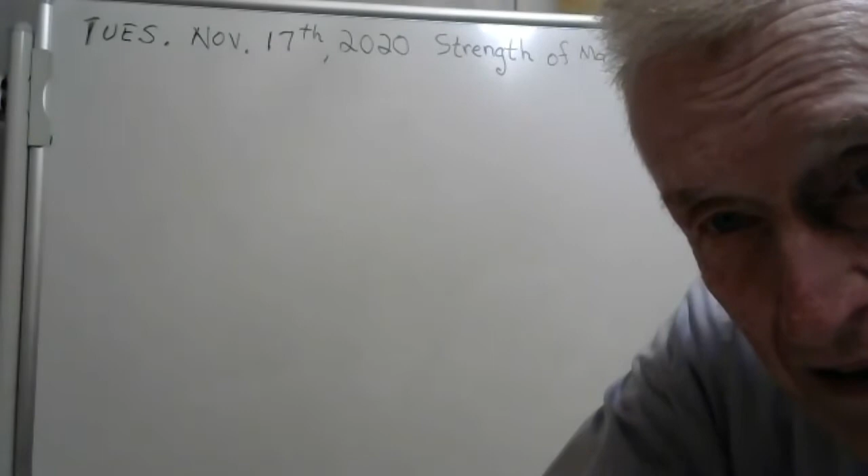Wonder why that's crooked. Yeah, that's a little better. Maybe I could scoot this. Yeah, that's good. Hey, how about it, you two? Any questions for me? Not that I can think of. So did you say you're okay? Yeah, I'm doing pretty good. Well, that's good. How are you doing? Oh, terrific. Just doing just fine. This is the 17th of November. You realize in a month, this is all going to be over. Are you guys looking forward to that? Always. Yeah, it's going to be over.

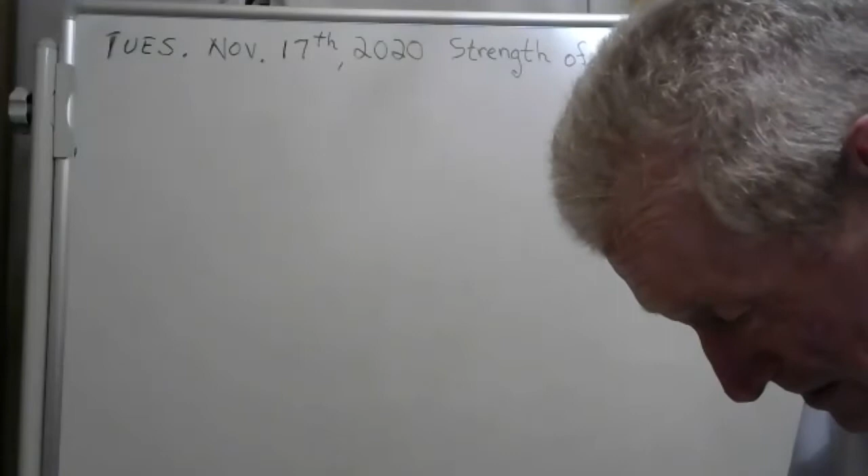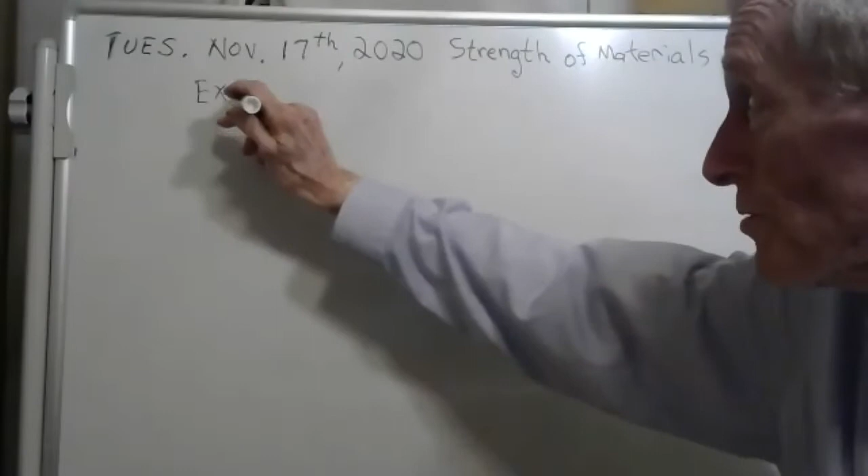Okay, I think your test is available. Let me look and see here. Today's the 17th. According to this, you're supposed to have your test available on chapter 6 and 7, and it's due Friday. So let me write that down. We've got an exam, a take home exam, open book. Isn't that nice? It should be available now, and it should be due Friday. This one doesn't write that good. Let me try a different one. Have you tried looking at that exam? Have you tried pulling it up yet? Probably not.

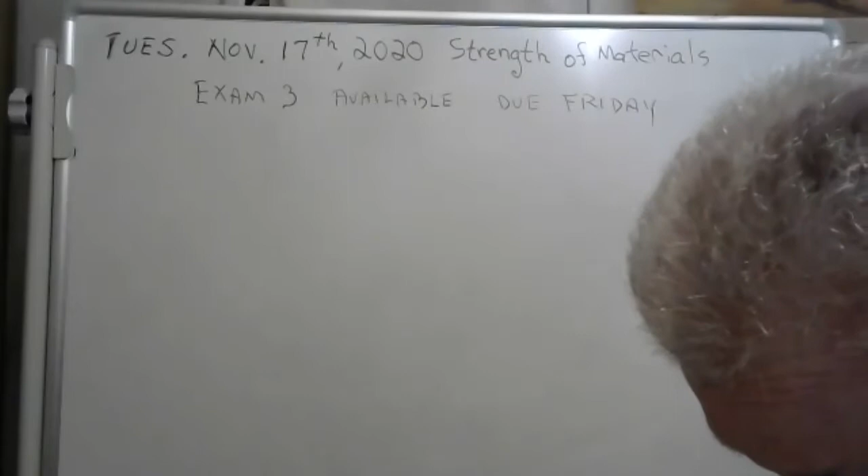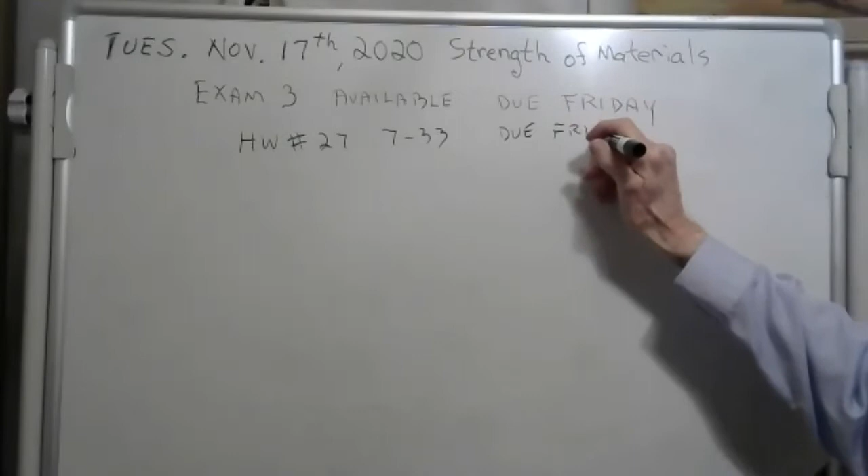But I think I make them available about 9 o'clock in the morning. This is the 17th, so yeah. There's a homework too. It's homework number 27. Homework number 27 is 7.33, and it is due Friday also. That one writes a little better. That's pretty good.

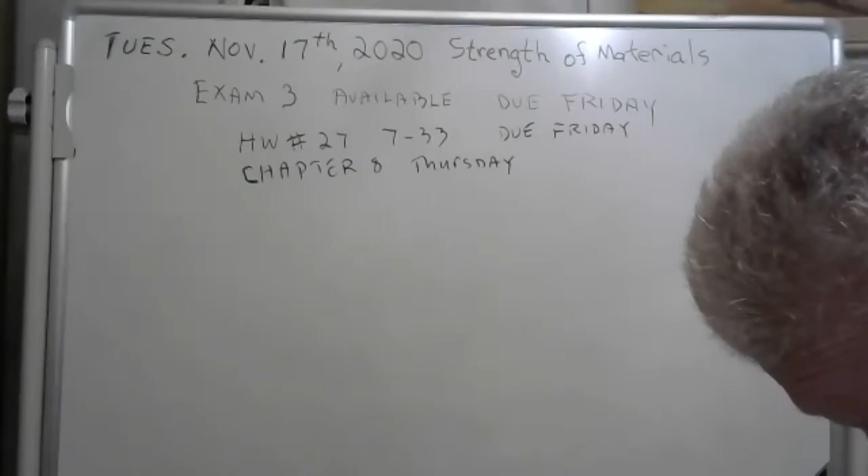And then that's going to conclude Unit 3, and we start on Unit 4 on Thursday, which is Chapter 8. So we start on Chapter 8 on Thursday. That'll be fun. And there's just not much school left here, according to this. This says the final is on the 10th? No, on the 8th. Final exam is on the 8th of December.

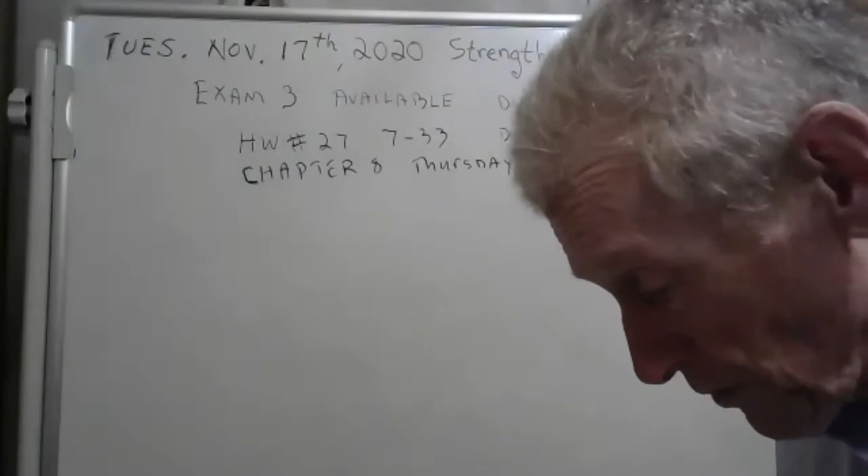I want to go over some basics. I want to go over a problem, review problem 7.5. That's what I want to do. And you know the first step on these problems is to draw a free body diagram. So let's do that first. Let me find it first. This is review problem 7.5. Where the heck is it? There it is.

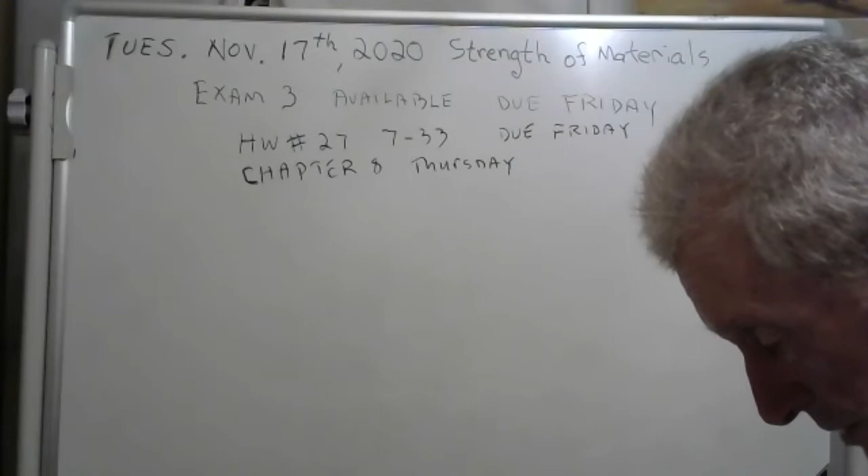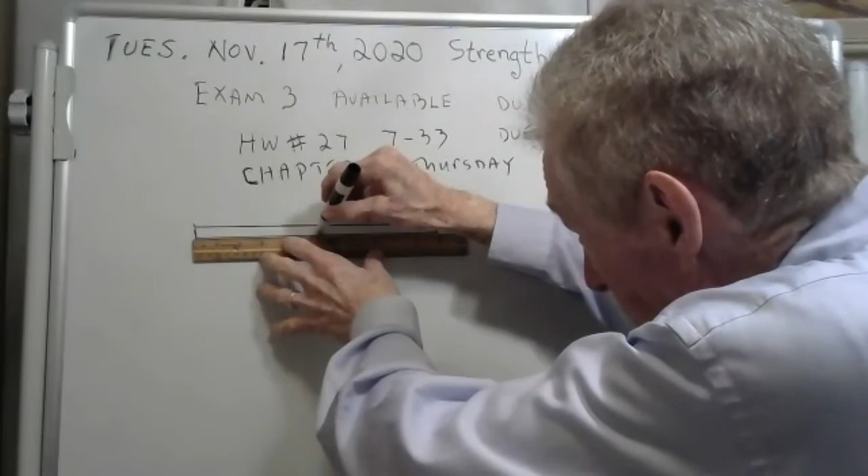Okay, let's draw this to scale here. It's 11 feet long. I'm tempted to use inches here. I wonder if there's enough room. Well, there's the announcements. We'll try drawing this. Okay, we got 11 here. And it looks like right in the middle, would that be 5.5? Something happens. And then something happens at 4, and something happens at 7.

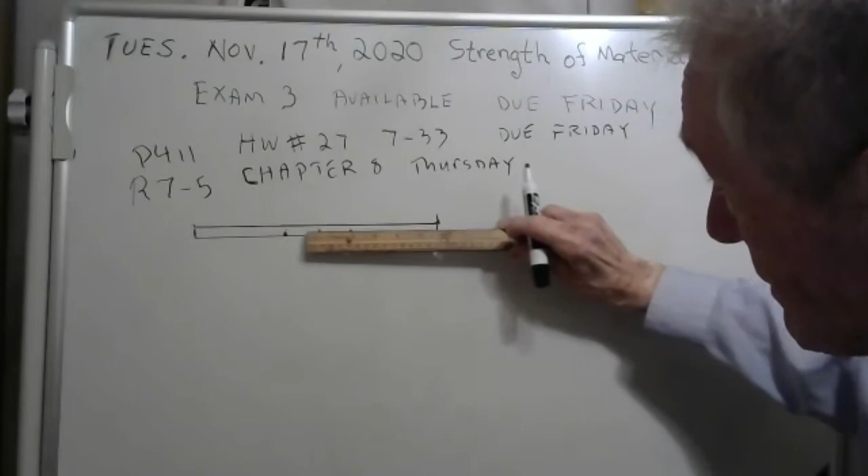This is review problem 7.5. It's on page 411. And I thought it'd be fun to go over this because it hits a lot of the basics. Now, did I measure that right? 4 inches there. Yeah, I did pretty good. 3 inches there, not too bad.

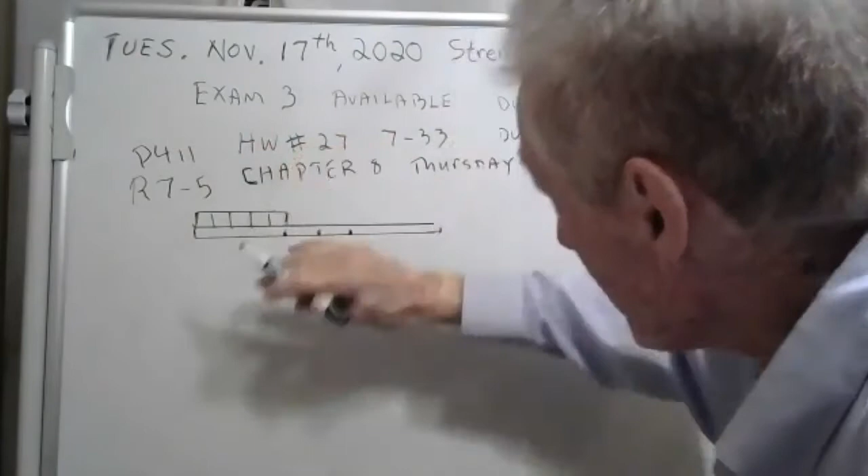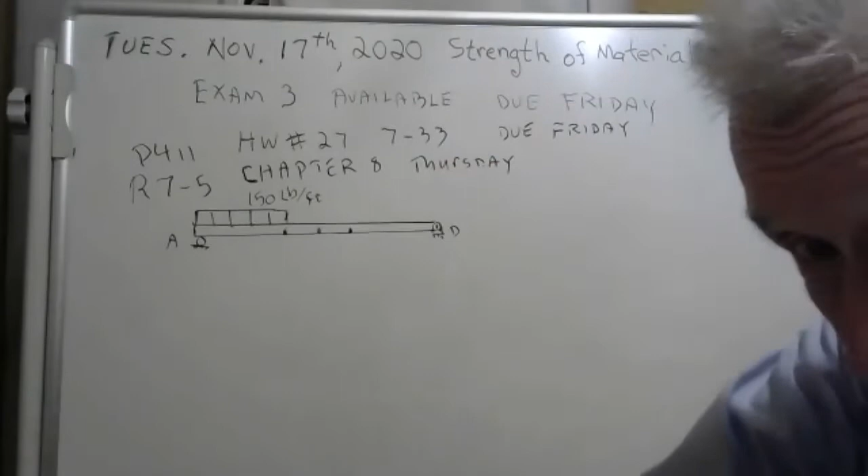Okay, now they have a distributed load there of 150. Let me draw that. Distributed load, 150 pounds per foot. Is that what it is? By Jove, that's what it is. 150 pounds per foot, going down. And then they have a roller here at A, and a smooth pin at D. I have to get some glasses one of these times, but not yet. And there's an 800-pound force right here. Let me get my red color. There's an 800-pound force right here.

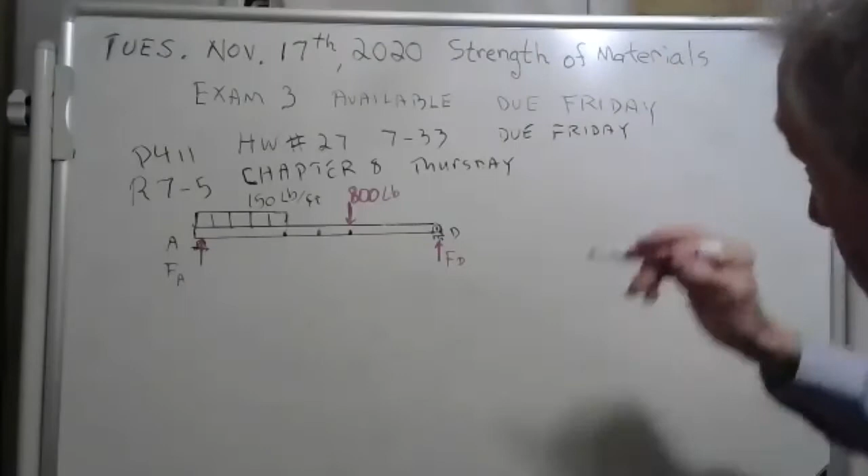Now we know there's going to be a force here at D, and there's going to be a force here at A. How about FA and FD? Those are nice names. Mr. Griffin? Yeah, I'm listening. 800 or 8,000? Ooh, we got our first thank you point of the morning, and it's a red one. That was Alex. Alex, appreciate your help very much, because I was going to get everything wrong. But thanks to Alex, we're going to get it right.

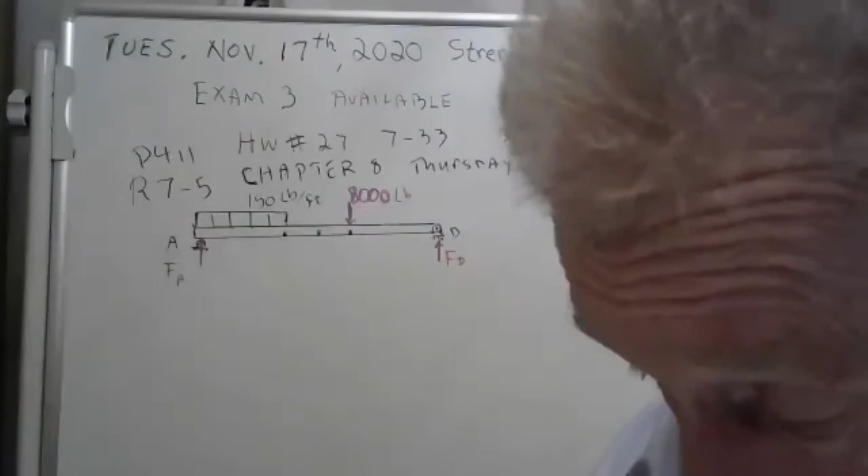Mr. Griffin? Yeah, I'm listening. I think exam 3 is still not available in the Unit 3 section of Strength of Materials. Say that again, Mohammed. I'm talking about exam 3. I couldn't see it in Blackboard. It's available? No, it's not there. Yeah.

Let me call my IT person. We're going to call the IT person here. It's so nice to have your very own IT person. Okay, we'll see if we can get her on the line here.

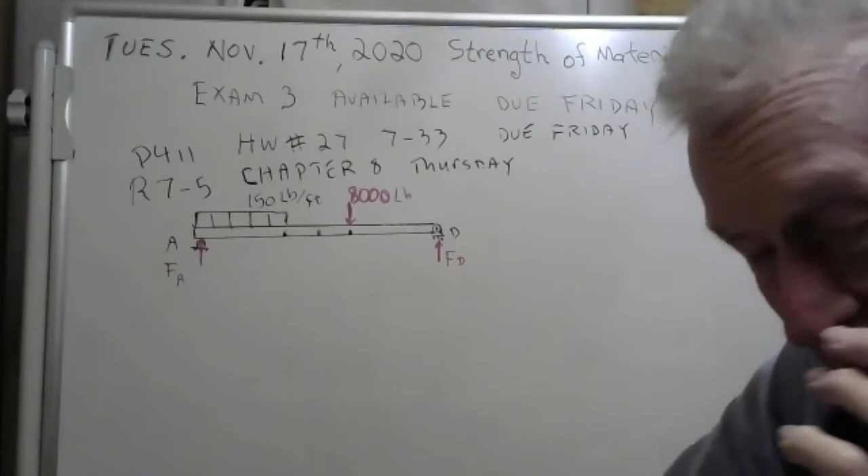Now, in the meantime, do I need to... Hey, IT person. Well, one of my excellent students says that exam 3 in strengths isn't available, and I thought it would be this morning. Okay, take your time.

You guys are pretty smart. Are we forgetting anything here? I don't think so. Now they have a section here. This is section little a, and we'll get to that.

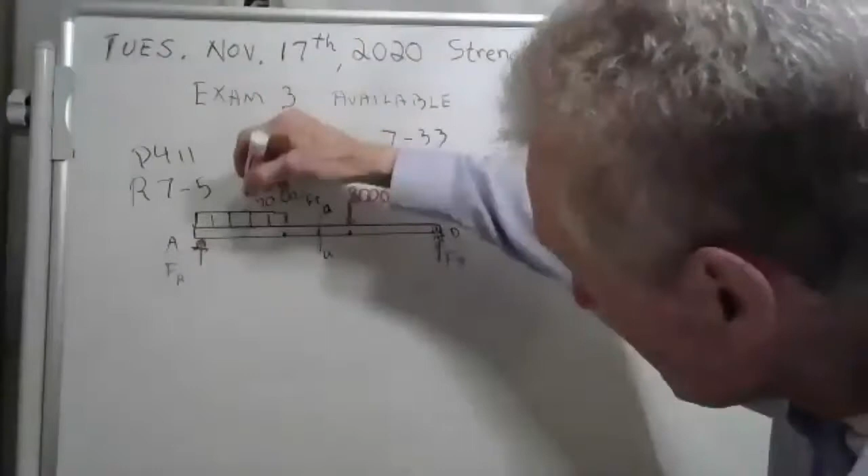But let's do this: let's put a red resultant force right here, don't you think? Let me get this red arrow here, and we're going to put it right here. Now you know that resultant force is the area of that distributed load.

So I'm going to call on one of my excellent students. Oh, I know what I forgot. I didn't put down 4 feet here. 1.5 foot, 1.5 foot, and 4 feet. So this area, you can figure it.

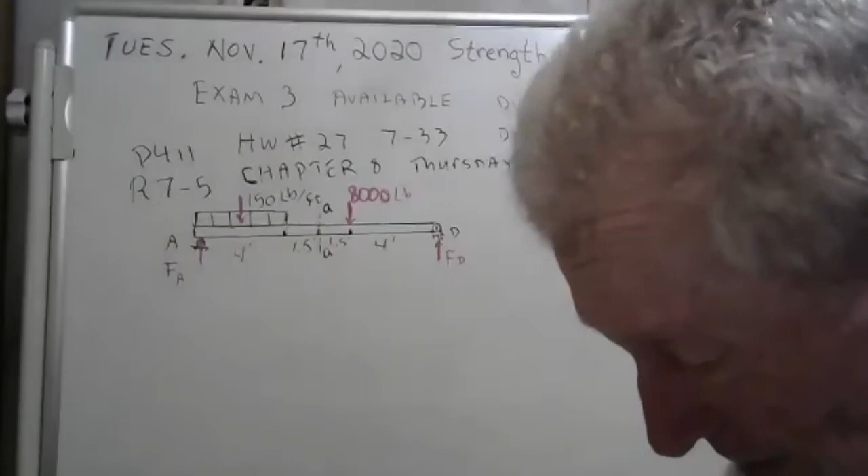I don't want to spoil your fun. Let me call on somebody. And... hey, thanks a lot, IT person. You're worth your weight in gold. All right, bye. Bye-bye.

That's a great IT person. You know what? Can't beat it. Ben Seaman, unhook. No, that's not right. Unlodge. No. Unmute. That's it. Hey, Ben, unmute.

And tell me, what's the value of this resultant of that distributed load? You tell me. It would be 600 pounds. Oh, that guy is sharp. He knows his stuff. It's 600 pounds. Good going.

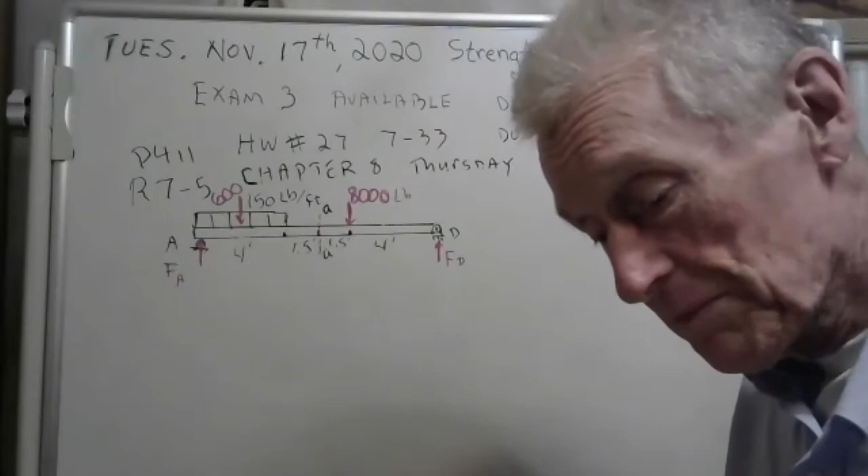Okay, I think we're done with all the red stuff. And now the next job is... we're having a review, by the way. This is review problem 7.5. And we're just hitting some of the basic bonehead stuff that we're supposed to know.

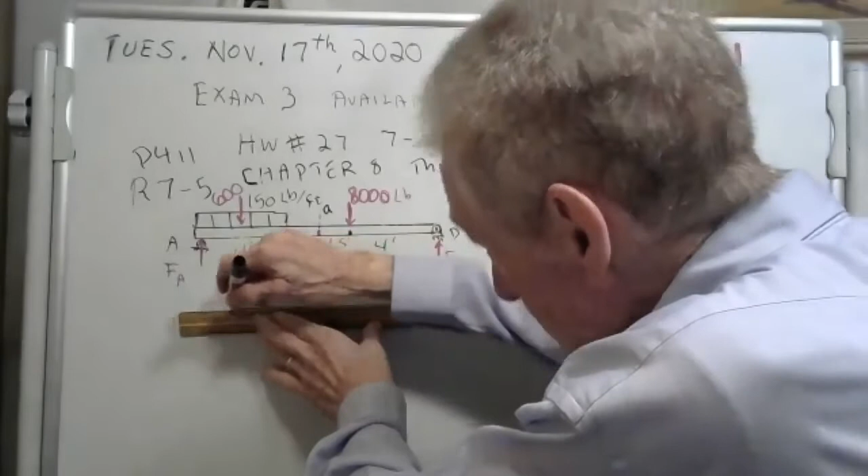And the next thing we're going to do is we're going to do a shear loading diagram. We're going to do a shear loading diagram. And it'll go like this. Come on now. There we go.

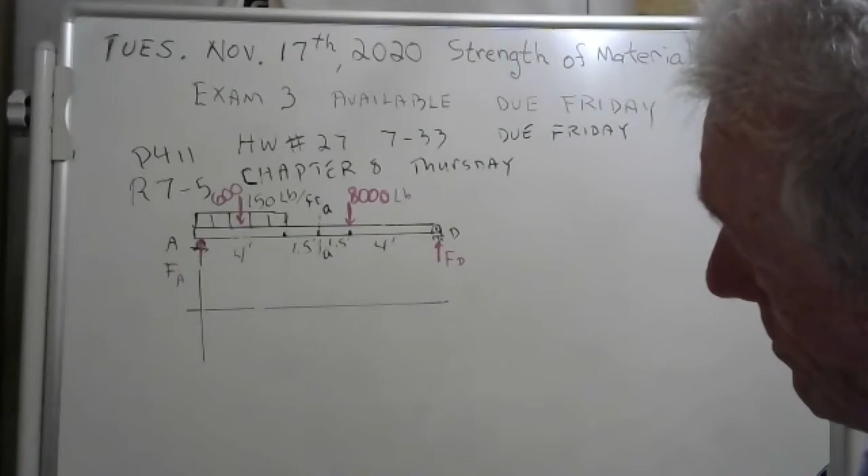Now you all have that scribbled down on your papers there. How about it? Why don't I shut up for 1 minute and give you a chance to draw the shear loading diagram. And then I'll draw it and we'll compare notes. Go for it.

And then we'll draw the shear loading diagram. And then you know what we should do after that? What would really be fun is after we do the shear loading diagram, I think we should do the bending moment loading diagram. What do you think? I think that's a good idea, Mr. Griffin.

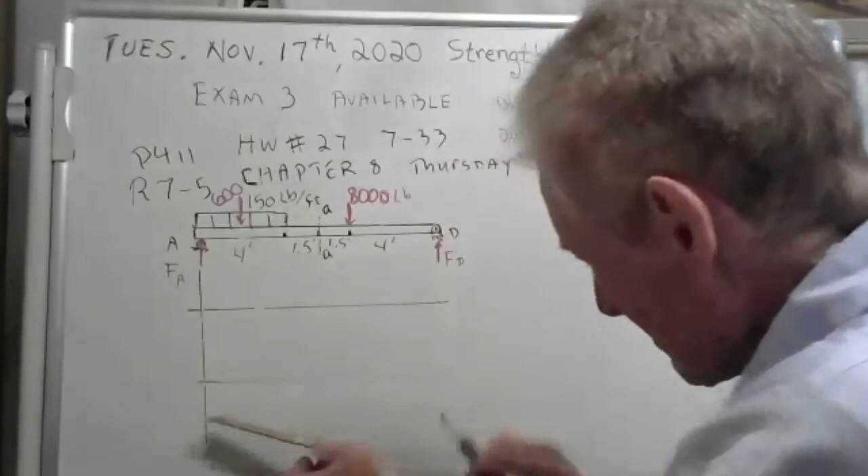Yeah, we're going to do both of them, but I'm going to give you a chance to. Did that show up? It's awfully faint. Let me make it darker here. Need to get a different pencil, I think. Not happy. Try this one. Still not doing good. Come on. Just not happy with these pencils.

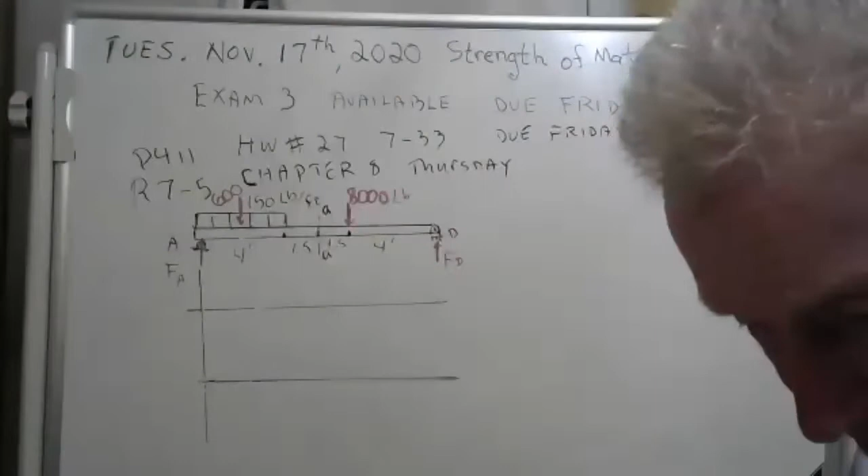Okay, I'll give you another 30 seconds or so. See if you can't give a try on that shear loading. See, right now we're trying to draw... ooh, that one works. We're trying to draw the shear loading and bending moment loading diagram.

Oh, wait a minute. I forgot something. We can't draw those diagrams right until we figure out these external forces. I skipped a step, didn't I? See, first you draw the free body diagram. Then you put in the external forces in red, and then you find the ones you don't know. Okay, well, let's do that.

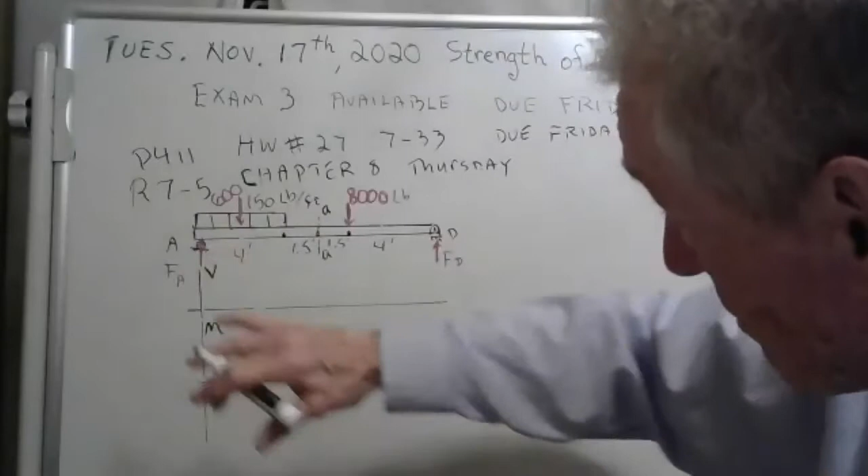Well, we got to find, never mind drawing these diagrams unless you're way ahead of me. Some of you probably are by now. We got to find these forces. Here's what you could do: you could take the moments about A, for instance.

And you would have minus 600 times 2 feet, right? And then you'd have minus 800 times 7 feet. And then you'd have plus F sub D times 11, 11 feet, equals 0. Uh-oh, I ran out of room there.

All right, help me do that. And we'll get our force at D there.

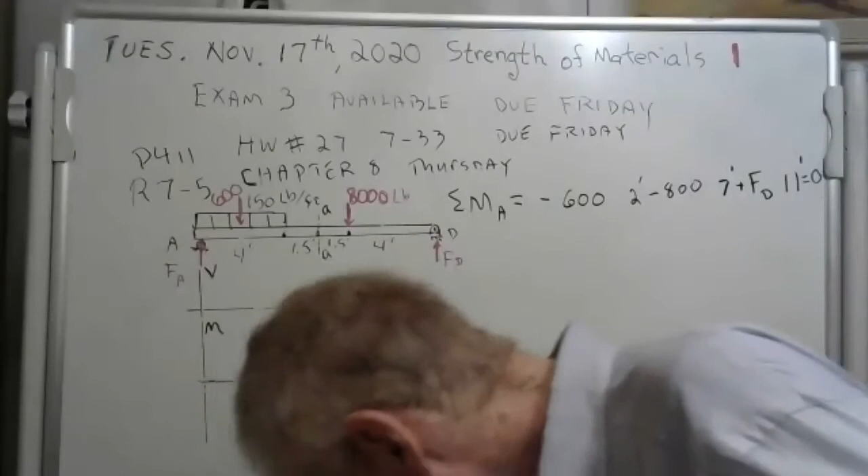I did something wrong, let me do it again. Yeah, here's my problem, that's 8,000, not 800. I wrote it down as 800 again. But one of my excellent students helped me out and got a nice thank you point for it, though I don't remember which student it was.

Okay, I think I've got this F of D here. I got 5,200 pounds. If you got 5,200 pounds, say uh-huh. Yeah, that's what I've got. We're doing good. Now we're going to get to F of A.

Now the way to do that is the sum of all the forces has to be 0. So you've got 600 and 8,000 going down, 5,200 going up, and then you have this F of A. That has to equal 0.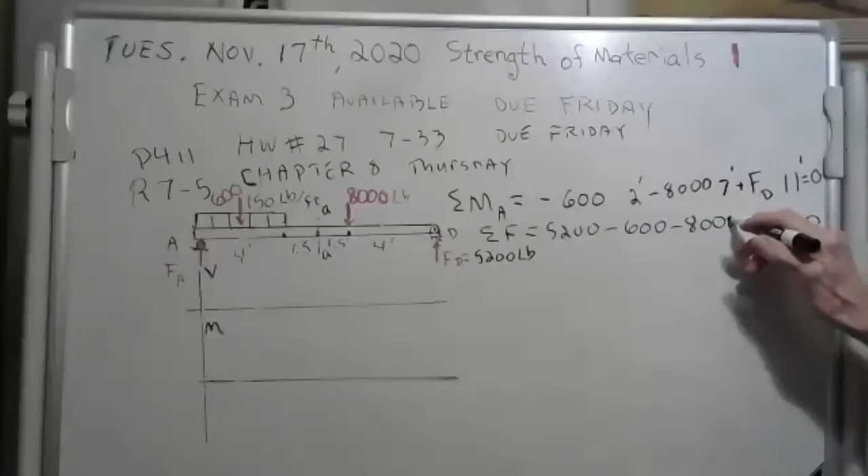Okay, let me do that. Now wait a minute, how come I keep writing 800? It's 8,000. When will I ever learn? That's the bad thing about habits, they become ingrained and you can't shake them. You've got to replace them with a better habit, like doing it right in the first place.

Okay, let me try this: 5,200 minus 600 minus 8,000. Did you get 3,400? F of A here, we think is 3,400 pounds. There we go, we got FA.

Now we're equipped to do the shear loading diagram, and here's what it's going to look like. You're going to have a value here of 3,400. Because these are going down, you're going to have to subtract. We know the area of this distributed load is 600 pounds, so you're going to subtract 600. What's 600 from 3,400? If you subtract 600 pounds, you get 2,800 maybe. Does that work?

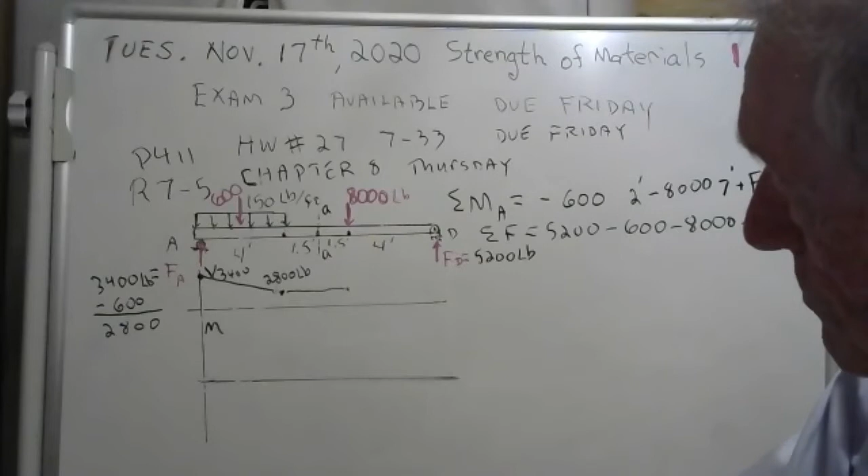And then what happens? Well, it stays the same, it's flat, till you get to here, and then it goes way down 8,000. So subtract, just a minute, subtract 8,000 from 2,800. Let me try that. I get minus 5,200, there we go.

This is minus 5,200 pounds, and this is 2,800 pounds. And we're done, we've got our shear loading diagram now. Does yours look like that? I hope so.

And now we're going to do the bending moment loading diagram. How do you do that? I think I've told you guys, you can just look at this and see there's nothing that's going to twist this thing here. That's just a roller, so you're going to have a 0 value there, and a 0 value there for your bending moment at both ends.

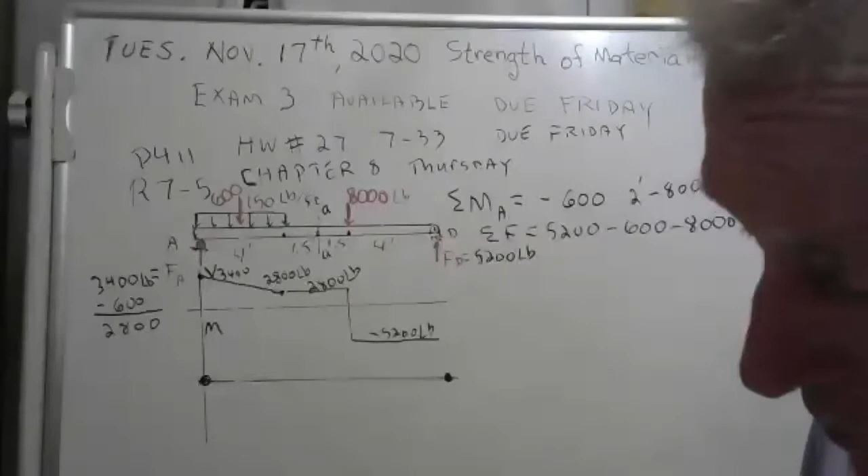And then you've got these lovely equations, you have one that goes like this, and one that goes like this. What this says is that the shear is equal to the slope. Now this shear is positive, so you've got to have a positive slope. So if it starts at 0, we've got to have a positive slope going positive. But you notice the shear gets smaller, so the slope has to get smaller. So I think it kind of goes like that, and the slope gets smaller.

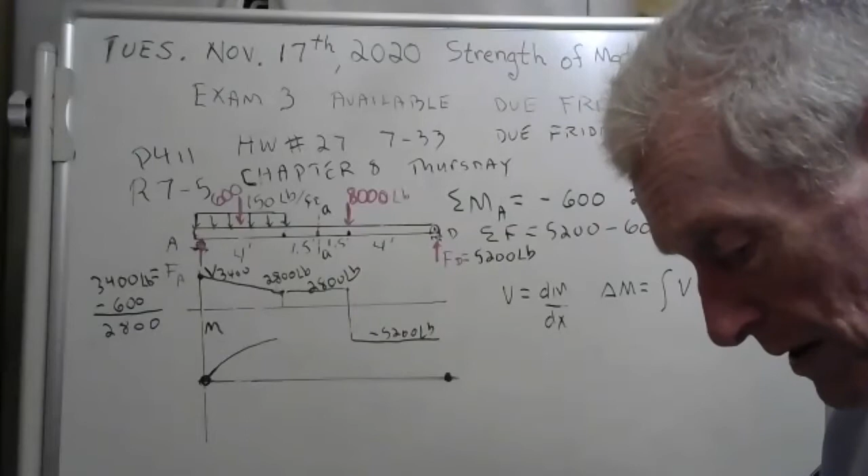And I can tell you how much it goes up, it's equal to this area. Well, what's the area? You see this trapezoid right here? Let me color it. Guys, what we're doing right now is having kind of a review of some basic important stuff here. The area underneath the shear graph is going to equal your delta M.

That area, well, I can get the area of that, it's a trapezoid. They taught me in school many years ago that the area of a trapezoid is like that - it's equal to the sum of the heights divided by 2, times the base. Do you remember that from school, that the area of a trapezoid is the sum of the heights divided by 2, multiplied by the base?

Well, you see the base is 4 foot, and here's the heights. I'm going to add those up and divide by 2. Alright, 3,400, 2,800, divide by 2, okay, I did that. I added the heights, divided by 2, now I'm going to multiply by 4. I got 12,400. This value of the bending moment right here should be 12.4 kip feet - I got 12,400, but we can give it that little extra pizzazz and call it 12.4 kip feet.

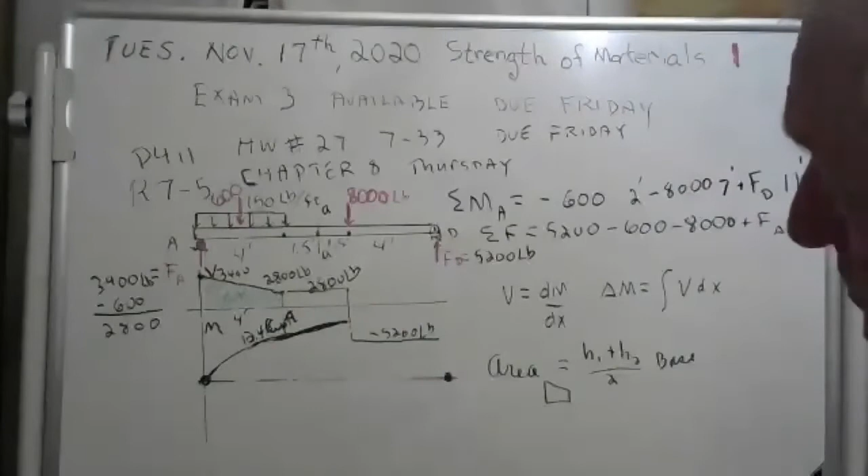See, it's a constant amount. I can tell you how much it goes up - it's the area of that rectangle. Let me color that rectangle blue. There we go. Does that show up blue on your picture there? Yeah, kind of. Well, you see that area there is equal to the change in your bending moment.

Well, what's a rectangle that's 4 feet? It's 4 feet, right? Yeah, no, it's 3 feet. I didn't do this to scale very good, but see, that's 3 feet there, and the height is 2,800. So the area of a rectangle is 3 times 2,800. Let me do that. I got 8,400.

So this thing goes up. You see, it was at 12.4, and it's going up 8,400, in other words, 8.4 kip feet. So that makes it should be 20.8. This value right here should be 20.8 kip feet. That's your maximum bending moment, 20.8 kip feet, because I've got to go back down to 0.

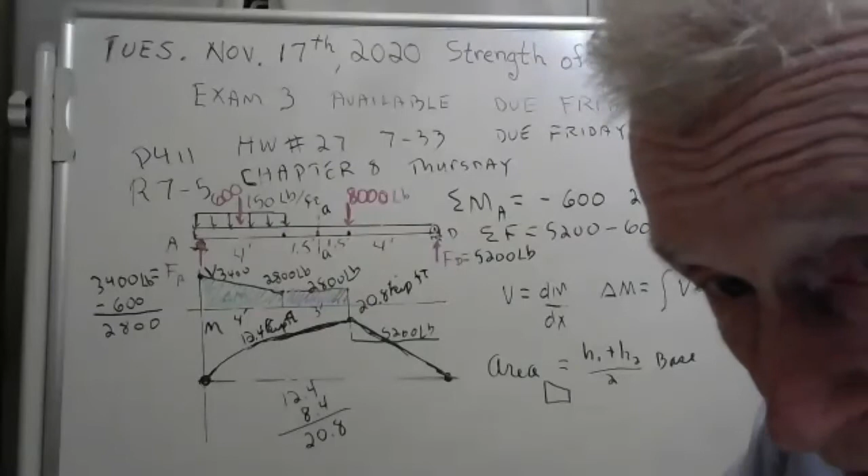And see here, the shear is negative, so that means the slope is negative. The slope goes down here, it's just a straight slope, straight down. There you go. By Jove, we've got our bending moment loading diagram. Isn't that nice? We've got our shear loading diagram and our bending moment loading diagram.

Now let's check it. This is called checking our work. It's a new concept I introduced a number of semesters ago to my students. It's called checking your work.

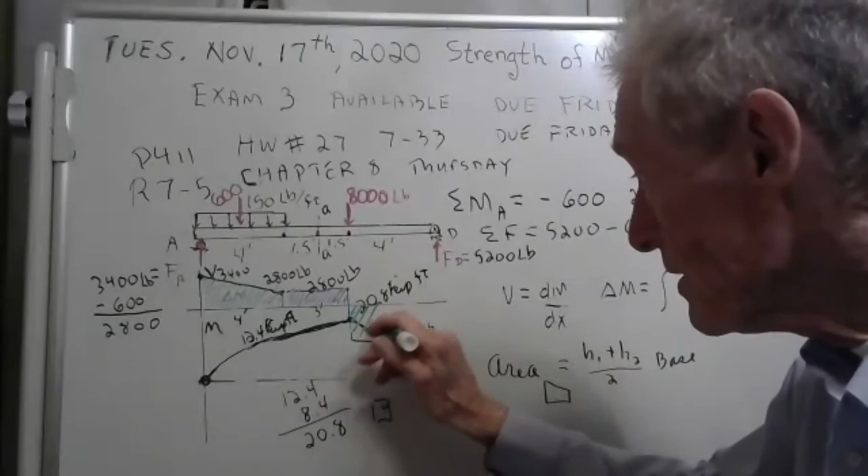What we're going to do is we're going to take the area underneath this shear diagram. See this here? The area, this is the area. We studied that in calculus - remember, the integral is the area. You knew that. We're going to take that area, and in this case it's this green area here. I'll color this one green. See this green area here?

That area is equal to the change in your bending moment. It's negative - I kind of lost my negative sign here. But I'll tell you what that area is. It's a rectangle, so you go base times height. Well, it's 4 foot this way. See, it's 4 foot. And it goes down, what is that, negative 5,200? Is that what that - can I read my own writing? Yeah, 5,200.

So if you have a rectangle and it's 5,200 by 4 foot, I'm going to multiply that. 5,200 times 4, I get 20,800. In other words, I get 20.8. When I do that, I get 20.8 kip feet. It has to go down, it's negative because that's a negative. Well, if you're at 20.8 and you go down 20.8, boy, you're back to 0 again.

That's called checking our work. It worked. I think we did it right. I think we have the bending moment loading diagram and the shear loading diagram.

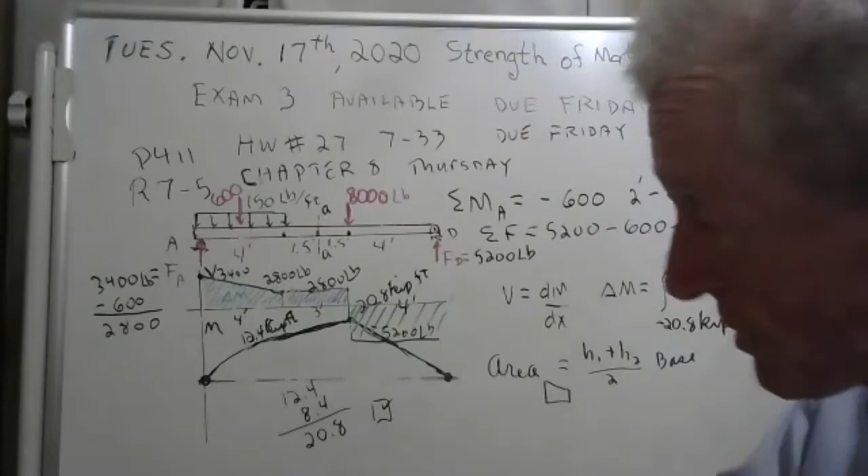And now that we have those, we could find the normal stress and the shear stress any place we wanted to. Here, let me show you the formulas. Let me make some room here. Do you have any questions about anything so far? Nobody said anything.

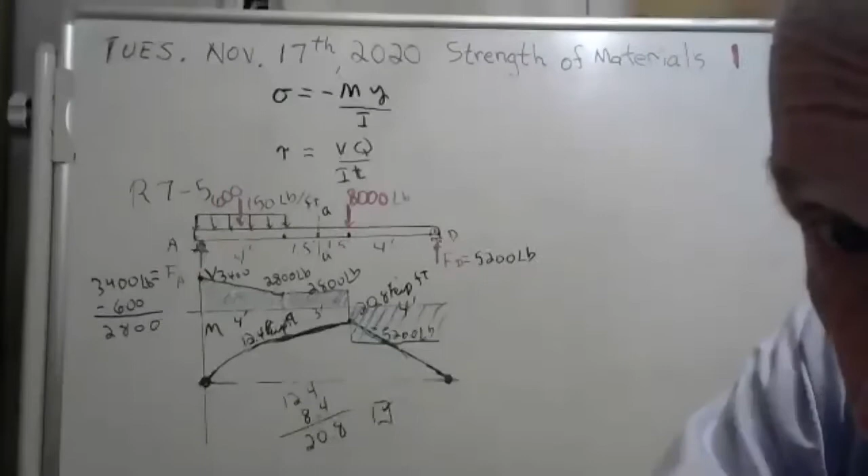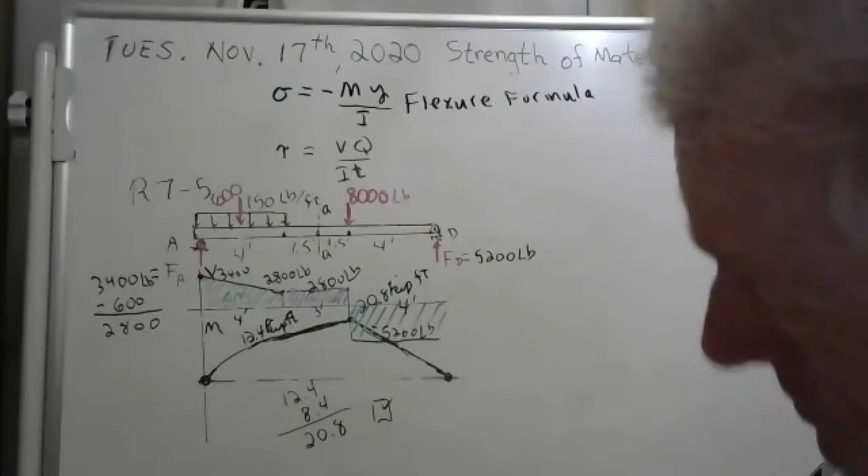And you know stress is where it's at in this class. Ashley, tell the class the names of these important equations. What's the name of that one? Flexure formula - she's got it. What's the name of that one? Let me write down that name here. Ashley's right, this is the flexure formula. Very important equation, gives you the normal stress. Shear formula - yeah, good going, Ashley. Thank you, Ashley, that's the shear formula.

To find the normal stress, you got to know what this bending moment is. To find the shear stress, you got to know what this shear force is. Now, how do you find those? How do you find the bending moment? How do you find the shear force? You find them from these diagrams.

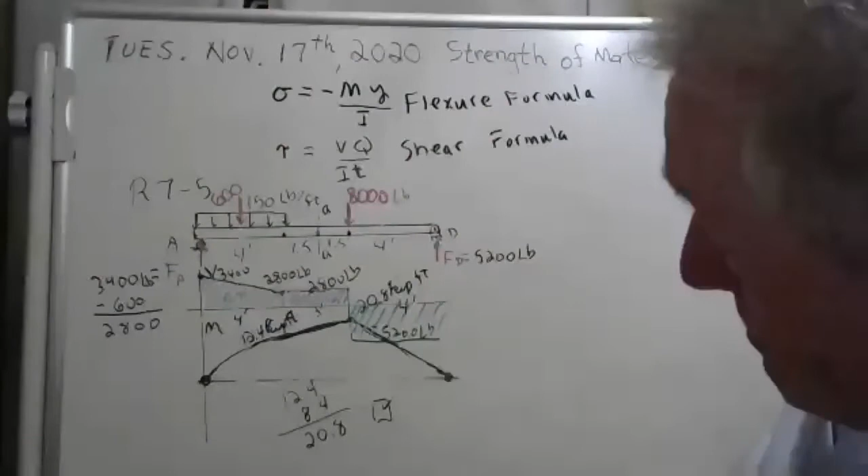You have to make the diagram, and from the diagram you can ultimately find the stresses. See, it's stress that breaks things. You have to have the diagram. But we have a problem. Houston, we have a problem. We don't have this moment of inertia yet.

We got to get that. Okay, well, look here, I'm going to circle this. We got these, we feel pretty happy about those. But we need these moments of inertia here. All right, well, here we go. We're going to work on that now.

Let me look at this and see here. Oh, gee, they've kind of got an upside down I-beam sort of affair there. All right, well, we're going to try our best here.

Do I have room? I probably have room. Now we're going to have a 6-inch. I wonder if I could use inches. Why not? We'll do inches. That'd be good.

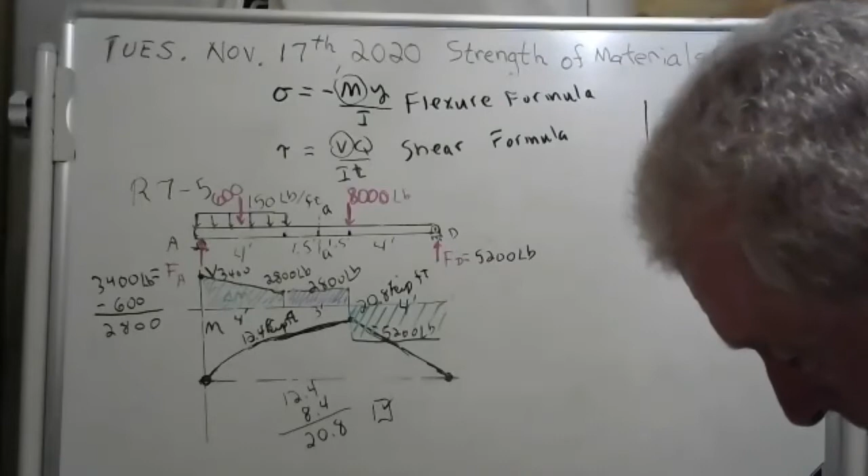You guys do your stuff to scale when you do it, don't you? Oh, of course we do, Mr. Cooper. Now let's see, what's the width of it? 1/2 inch is pretty skinny, isn't it? Yeah, pretty skinny. 1/2 inch, that's not very big. Not very big. Okay. Not very big.

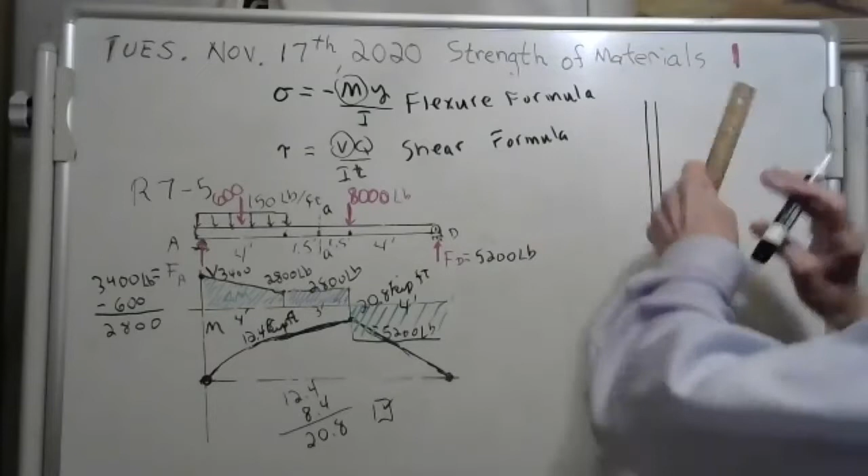All right, and then we have 2 inches. We got 2 inches up here. All right, well, we can do that, no problem. But now that's a little thicker. That's .75, that's 3/4 of an inch. That's a little bit thicker, not much, but it's a little bit thicker.

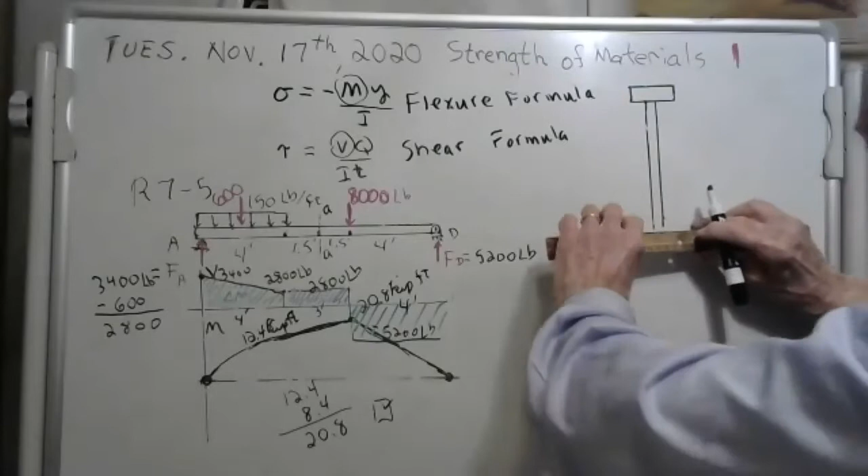And then what do we got down there? We got, did I do that right? 2 inches? Yeah, I did it right. And this is 4 inches. Okay, let's do 4 inches. Here, let's see, 4 inches will put us right here. There we go.

Now we've got to find, hey, wait a minute. Before we can find the moment of inertia, we have to find the centroid. You know what, we're going over some really basic stuff here, aren't we? Well, let's see if we can find the centroid.

Now here's the secret to finding the centroid. What you do is you put a red dot right here, put one right here, and you put one right here. That's how you have to start to find the centroid.

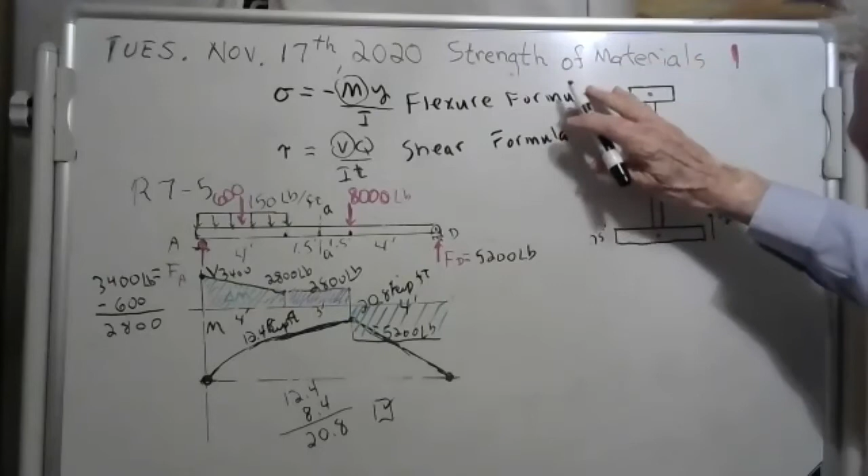And we'll measure the centroid from down here. This will be our y coordinate. I probably should write down this is 0.75 inches. And that piece in the middle is 6 inches. 0.75 inches. Two inches, 4 inches. But now this here is only 1/2 of an inch. It's just 1/2 an inch. Okay.

Now what now? Oh yeah, we're gonna find the centroid. Here we go, you know the formula. All centroidal formulas look the same.

Hey, do you notice in the numerator here, they have the sum of yi, ai. We learned the name of that. That has its own special name.

Let me go to one of my excellent students here. Let's see, Alex. Hey, Alex, are you the one that got this honking big, thick, red thank you point a while ago? That is correct. Man, we appreciate you, Alex. But now this is a tough question. You probably won't get this, but I'm asking it anyway.

Alex, you see this term right here in the numerator, it's got its own very special name. Alex, what's the name of that term there in that numerator? What is it? Is it the first moment of area? That's it. By Jove, that's it. Good going, Alex. Even a blind squirrel finds a nut now and then. How about it, I'm proud of you. Now look, that's what that Q thing is, Alex. Remember when we do this here? That Q, that's what that Q is.

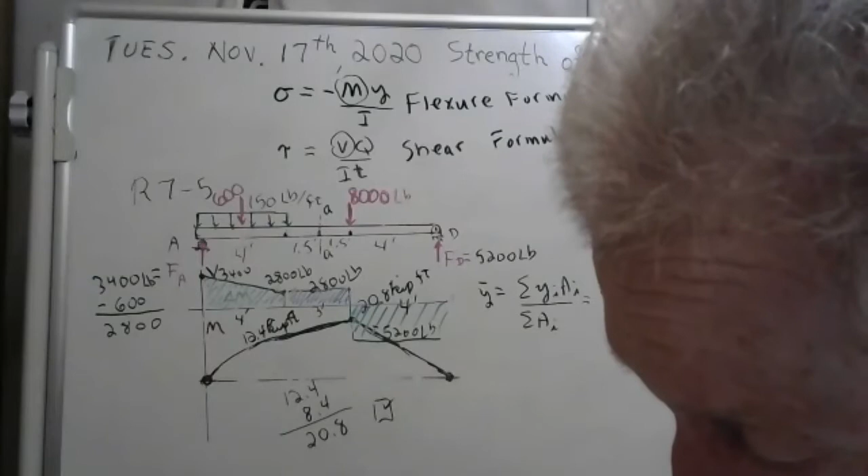All right, so here we go. We're going to go 0.375 times 0.75 times 4, plus 6.75. Mr. Griffin, yeah, shouldn't the middle one there be 3.75? Just a minute, just a minute.

You're absolutely right, and I was absolutely wrong. Now, who was it that just helped me then? Who was that? Brian. Brian? Yep. Brian gets a nice big honking thank you point. Good going, Brian. You're absolutely right.

It's 3.75 times 0.5 times 6. Oh, gee, I ran out of room here. Oh, well, we can always tack on some more. It won't hurt anything. Plus 7.125 times 0.75 times 2. But we're not done yet. We got to divide by the area. Now, see, these are the areas here. So you got to divide by the area of each one.

Now I'm going to shut up for a minute and a half or whatever it'll take, and I want you to plug all that stuff in. Man, that's a lot of trouble just to get that stinking centroid. They call this the centroid. Actually, it's a centroid of area because they also have centroids of volume. All right, go for it. I'm going to do it. You do it. Let's see what we get. Here we go.

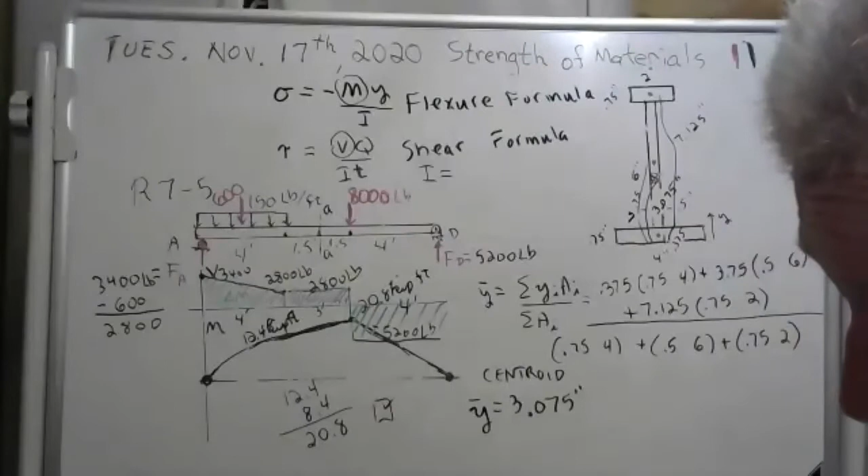That took a while just to get the centroid. Now, once you got the centroid, we're on our way to finding this moment of inertia I. So here, let's write the equation for that. Now this stuff is just tedious. It's like doing your income tax. It's kind of unpleasant, really. But we can do it. And can you see you can make a mistake here? Like I make mistakes all the time. Look at those thank you points. My students are smarter than I am. But when you're dealing with something like this, you might want to double check it because money could be involved. Not only that, people's lives could depend on you getting this right.

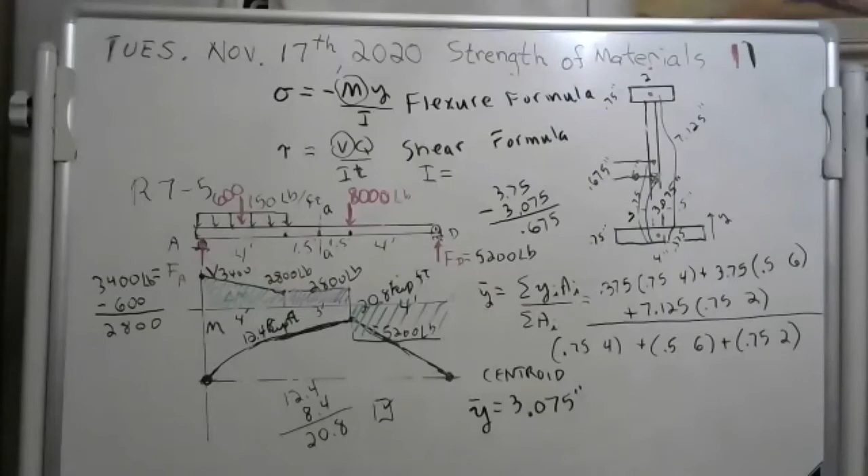Okay, well, let's see. Here we go. Now to find this, we're going to need this distance. This is so messy, it's hard for me to draw it. But I'm going to need this distance here between the centroid of the whole piece and the centroid of the web. It's 3.75 minus 3.075. I think it's 0.675. Do you think I might have done that right? Yeah, that's right. That distance there is 0.675 inches. We've got to have it. Hope that made sense.

Now I need this distance here, from the centroid of the whole piece to the centroid of this top flange. Now to get that, to the top flange is 7.125, and to the centroid, it's 3.075. So the distance from the centroid of the whole piece to the centroid of the top flange is, I wonder if I did that right, 4.05, you think? By Jove, I think that's right. I think this distance here is 4.05 inches from the center of the whole piece to the centroid of the top flange.

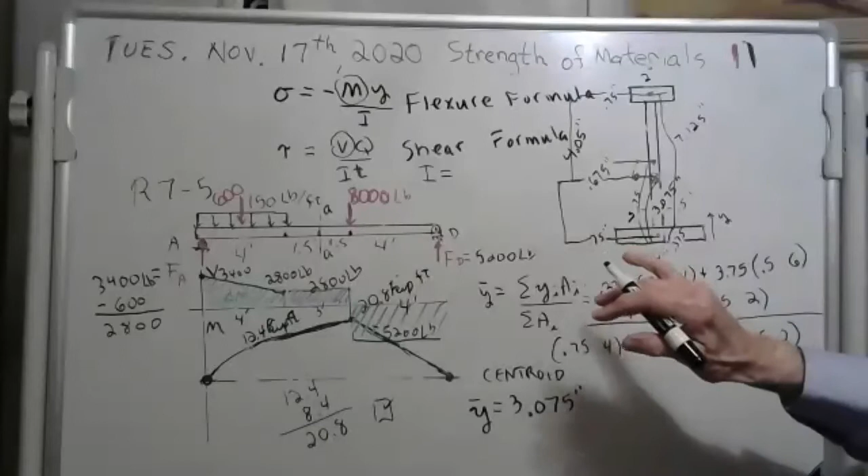Lastly, we need this distance from the centroid of the whole piece to the centroid of the bottom flange. We can do that. It's so important for you to draw your diagrams to scale. See, I got my ruler out and I measured 6 inches. Ta-da. Do it to scale. Okay, now this distance here is 3.075 minus the 0.375. I know how to subtract. I get 2.7. That distance is 2.7 inches.

Now, after all that work, we're finally ready to figure out our moment of inertia. Okay, I need the room here. Now, where am I going to do it? Down here. Look at all this room we got. We don't need this anymore. We figured this out.

We are going to write the equation. We're going to have to use the parallel axis theorem, and we're going to write the moment of inertia of the cross section of this beam. Now, why don't we start with this bottom flange? We're going to go 1/12, 4 inches times 0.75 inches cubed. But see, it's at a distance of 2.7 inches from where we want to be at, I think.

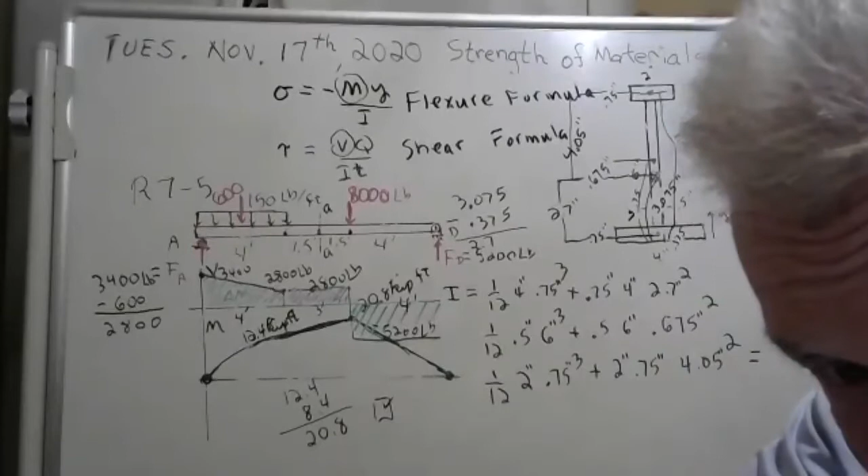Hey, Shane, unmute and tell me if you got that yet. Yeah, I got 57.052. That's exactly what I got, Shane. Holy cow. It's a miracle. Good going. So let me write the answer here. It's 57.052. Hey, Shane, what would be the units on that? Inches to the fourth. Yeah, good going. Inches to the fourth. Hey, we made a lot of progress here.

Now, if anybody else got that, say, uh-huh. Uh-huh. Yeah, I get that. There's 2 or 3. Yeah, great. Okay, well, now look at here, guys. We figured out this I now. It took us a while. This is not easy to do, is it?

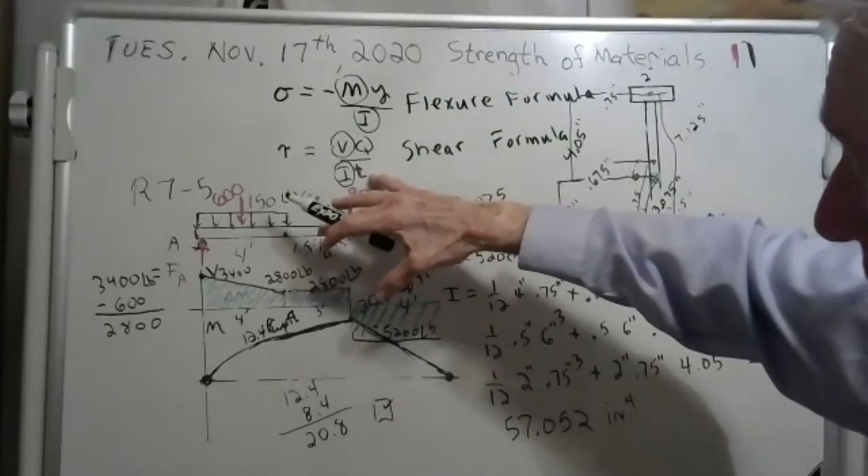Now, what about this thickness thing? They want us to find, let me read it again here, what they want, and we'll finish this problem off. They wanted the maximum shear stress acting at section AA. Well, at section AA, I know what the shear is, 2,800. I know what that is, 2,800. I know what I is, it's 57.052.

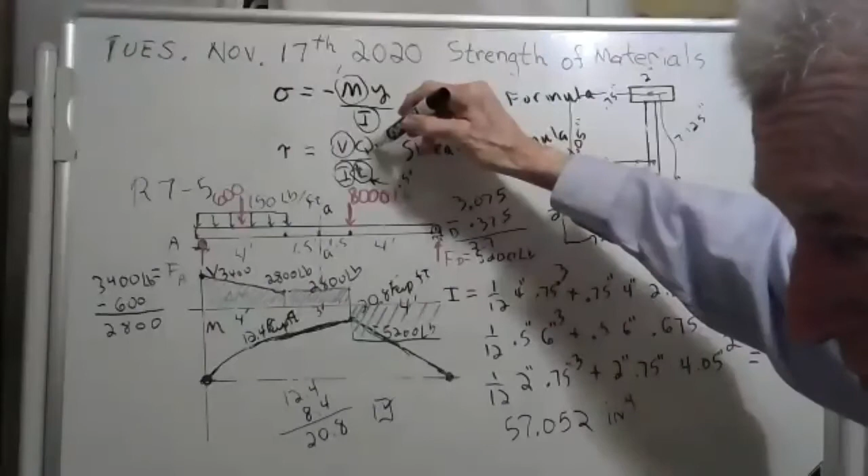Got that. Now the thickness is half of an inch. 0.5. That's how thick it is. It's 0.5 inches thick. So I know what that is. If I could only figure out this Q thing, that first moment of area thing, we could find the maximum shear stress at this cross section AA here. We could do it. Okay, well let's find that Q thing. It won't hurt us any.

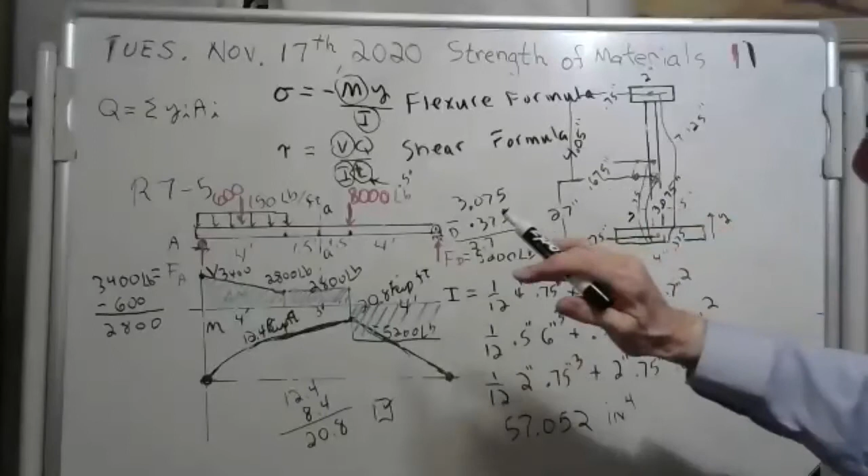There's a little room over here. Does it show up? Yeah, kind of. We're going to do the Q thing. And remember what it is. It's just the sum of the y_i A_i is what it amounts to. And do you remember the rules on how to do it? What you do is you draw a line. If you want the maximum shear stress, it'll occur here at the centroid. You draw a line through the centroid. I'm doing that now.

And then you color everything above the line. Okay, well, let me do that. I'll get some color here. Here's some blue. This is what you do. You color everything. Ta-da! I just colored everything above the line. That's what I did. And then what you do is you take the centroid of this blue piece, which would be right here, and the center of that one, that's already got a red dot on it.

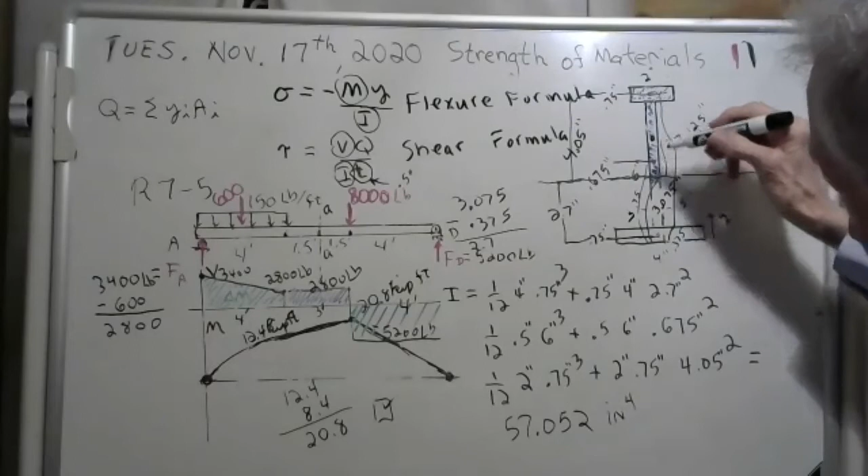And what we need is this distance here. Gosh, this is complicated, you know it? That distance there, we can get, now let me think. Let me make some room here. Gotta have some room to write stuff. Going from here to here, I know what that is. It's 3.075. Now coming all the way up to here, I think that is 6.75. So I'm going to take 6.75 and subtract 3.075, and that should give me this distance from here to here. Let me do that.

If I subtracted right, and I think I did, I just found that distance there. Now the area of that blue piece there would be the 3.675 times a half an inch. That'd be the area. But now what is this distance here? Well, that's the distance to the center of it. Well, you know what that would be? That'd be half of this 3.675. You'd have to divide it by 2. Yeah, by Jove. But now we're not done yet.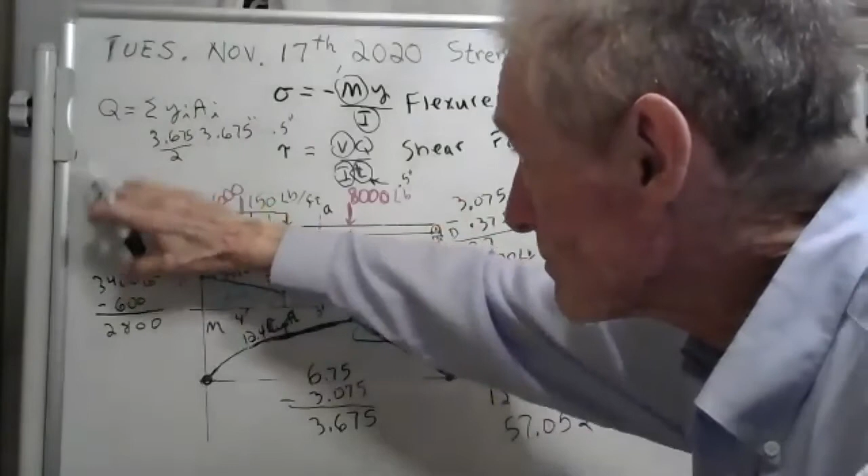We got to do this little top flange here. So I need a little room here. We know we're doing review problem 7.5. So what we'll do is we'll add to it the area of this little top flange, which is 2 times 0.75. 2 times 0.75, that's the area of it. So the area of this is that. But then we need the distance from here up to here. Okay, don't know what that is.

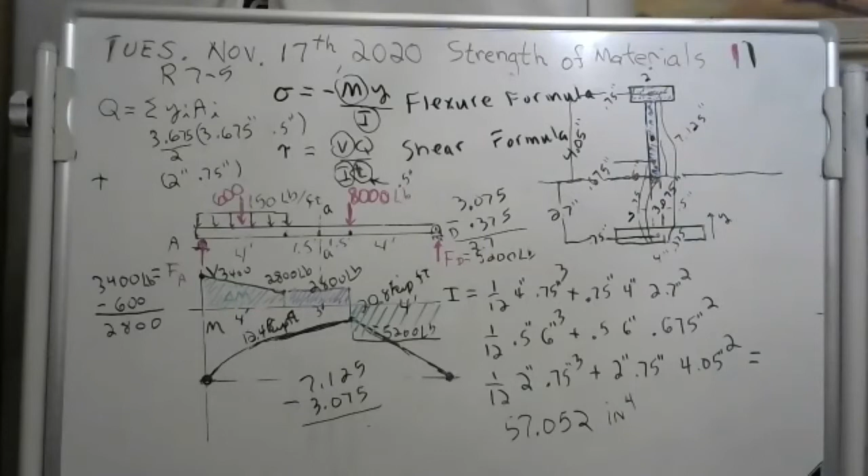But I tell you what it is. It's 7.125. Make some room here. 7.125 minus the 3.075, I think. I think that would give me the distance from here to that center, won't it? I think so, yeah. Okay, let me see what that is. That's a 5. You suppose I did that right? Yeah, I think so. So you have to multiply this by 4.05. You have to take this here and you add these and you'll get your Q. All right, do it. Let's see what you get.

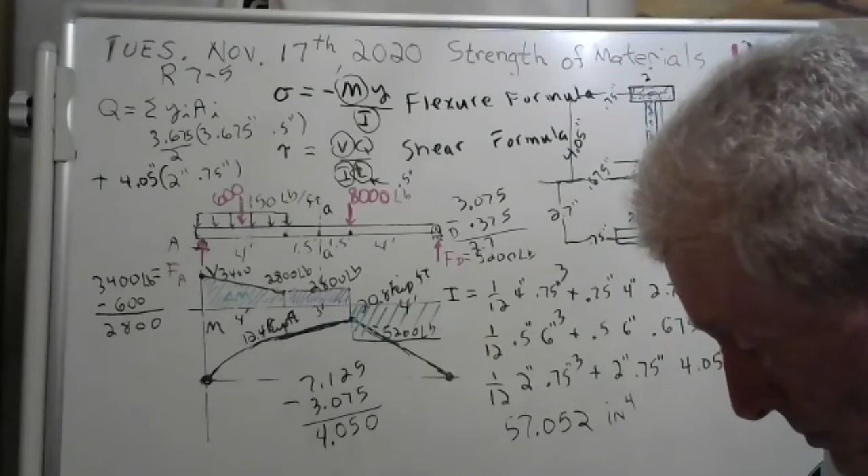We're going to find Q. They call it the first moment of area. Well, I got an answer. I'm getting 9.4514 inches cubed. That's what Q is. If you got 9.4514, say uh-huh. That's what I got. There's 2 of us. Uh-huh. I think that was an uh-huh. That was another uh-huh. Now let me show you something kind of cool.

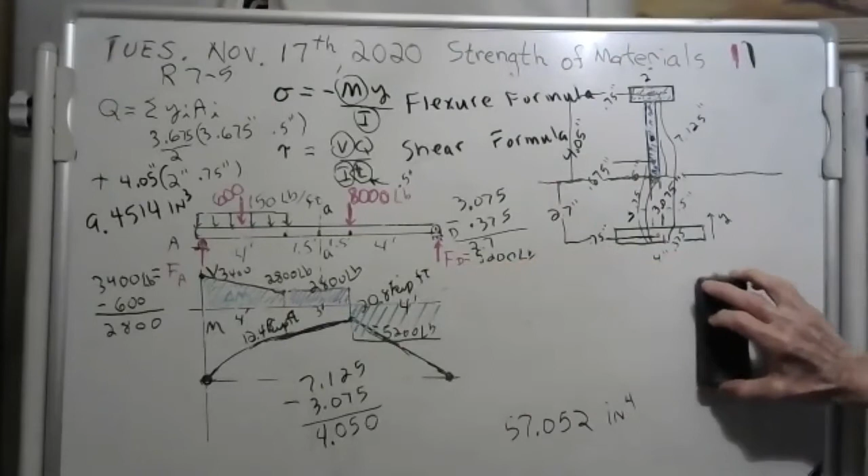You don't have to go above the line. You could go below the line. Here, let's do it below the line. I need some room. We don't need all this anymore. We figured that out. If you want to recover it, just watch the YouTube. We do need to keep this, though. That's the moment of inertia. This time, we're going to do it differently. We're going to color everything below the line. I don't think I've ever told you guys this. What I'm doing is I'm coloring everything

I'm showing you another way to get Q. See, this is what we think Q is. We think Q is 9 point blah, blah. But there's another way. And really what we're doing is we're checking our work because it's got to come out the same. We can get Q by going below the line. Okay. Well, again, we need these dots here. Put a dot in there right in the middle of that little guy. And how big is that little piece there? Well, let's see. See, here's what we're doing. It's called the first moment of area, and I'm going to do these two areas.

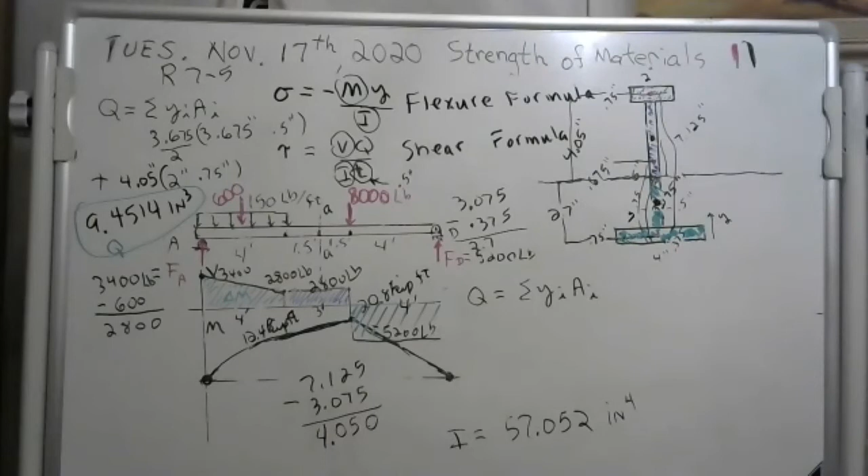Now, this area here, gee, it's, oh gosh. I think I erased some valuable stuff there. It's 3 point, yeah, there it is, 3.075 minus the 0.75. Let me write that down. 3.075 minus the 0.75 gives you, I wonder if I did that right. Did I subtract correctly, you suppose? Yeah. I'm doing this area right here. That area is 2.325 inches long and 0.5 inches wide.

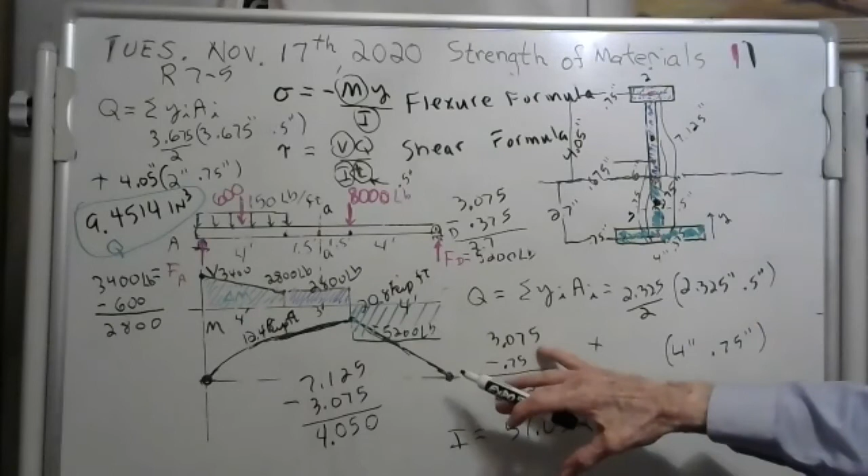But see, what we need is the distance from the centroid of the whole thing to the center of that piece, which I think is 2.325 divided by 2. That makes sense. Now we got to do this bottom piece. You have to add to it, the area of that bottom piece is 4 inches times 0.75 inches. See, that's the area of it. And what's the distance from the centroid of the whole piece down to the center there? Well, I think it'd be the same thing, wouldn't it? It'd be 3.075 minus the 0.75. It'd be 2.325, wouldn't it? Did I do that right?

I think so. Okay, I want you to take your calculators. And if we did this right, this should come out to be 9.4514. Try it. Try it and see what you get. Unless I made a mistake, which is definitely possible.

I didn't get it. I did something wrong. Now let me see what I did wrong. "Professor Griffin, I think the one in the bottom, 2.325, should be 2.7." I think you're right. It should be, you don't want to subtract this, you want to subtract, this is where I goofed up right here, guys.

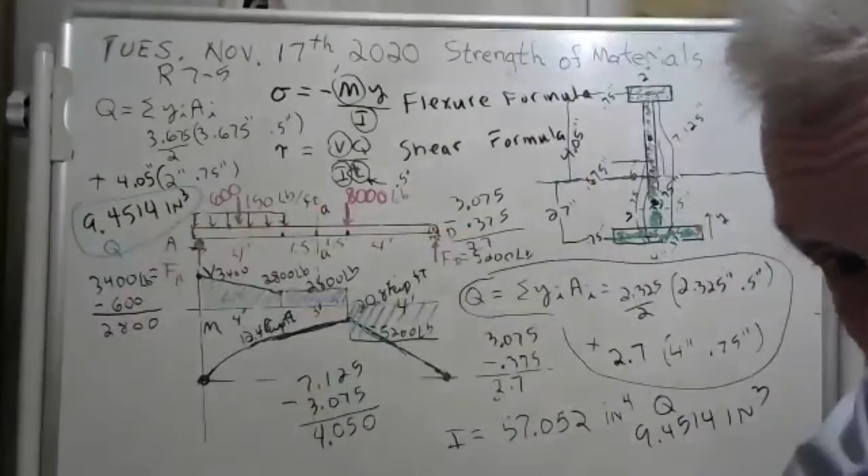Okay, here's what I'm getting. After doing all that, I'm getting Q is 9.4514 inches cubed. I got the same Q I got the last time. Hey, you know what? We just checked our work. We got the right Q, didn't we? It wasn't easy, though. Okay, now let's answer their question. They wanted to know what the maximum shear stress was at this section AA. Well, we got everything. We just need to plug it in. I'm going to make some room, and then I'm going to plug all that stuff in.

Now, the shear is 2,800 pounds. And the Q is 9.4514. And the I is 57.052. And the T is 0.5. Plug all that stuff in and we'll get the maximum shear stress. Go for it.

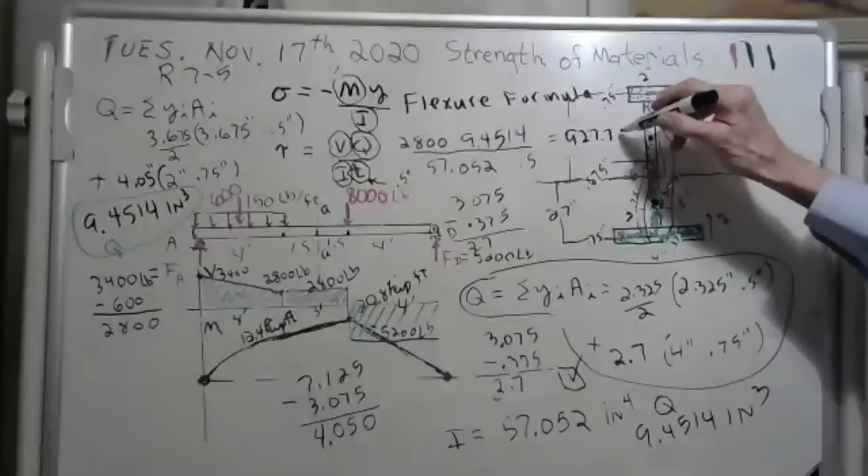Well, I wonder what you guys are coming up with. Let me do it again here. I'm not getting the answer in the back of the book. That's what's bothering me. Are you guys getting 927? "927? That's what I got." Okay. PSI, I think. And in the back of the book, the book says 795 PSI.

Book is usually right. And we only have about 3 minutes left for me to figure this out. This is R7-5. The book says 795 PSI. We got the shear right, 2800. We got the Q, we checked it, we did it 2 ways. I like our moment of inertia. And the thickness is 1/2 inch, right? I think we did everything right. And I bet between the several of us, we're all getting this. It should occur at the centroid, and we found the centroid.

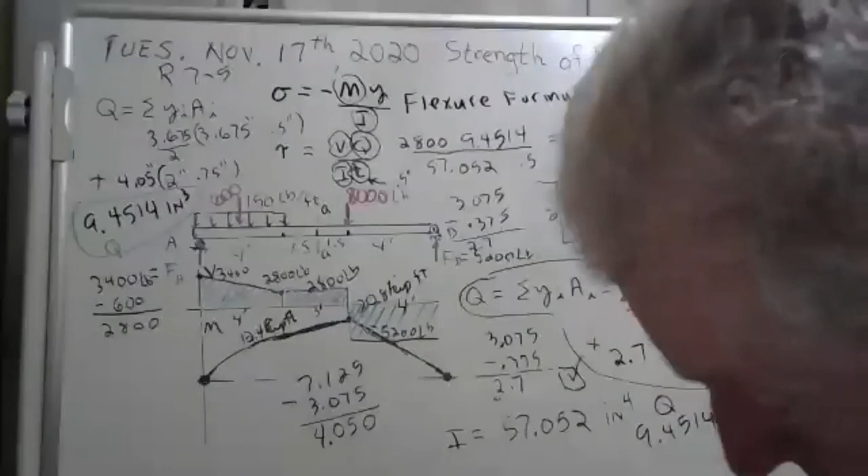"Mr. Griffin, wouldn't the maximum shear be 5,200?" Where did you see the 52? "On our graph." Oh, like the negative 5,200? Yes, it would. But that's not at section AA. Read it. Find the maximum shear stress acting at section AA. Well, that was an intelligent comment. That would be this shear in here. Have you plugged that in? You don't get the answer either, do you? "I got 1,722." Yeah, that's not the answer. Guys, it's a mystery. I think we did everything right. I'm sorry we didn't get the answer in the back of the book.

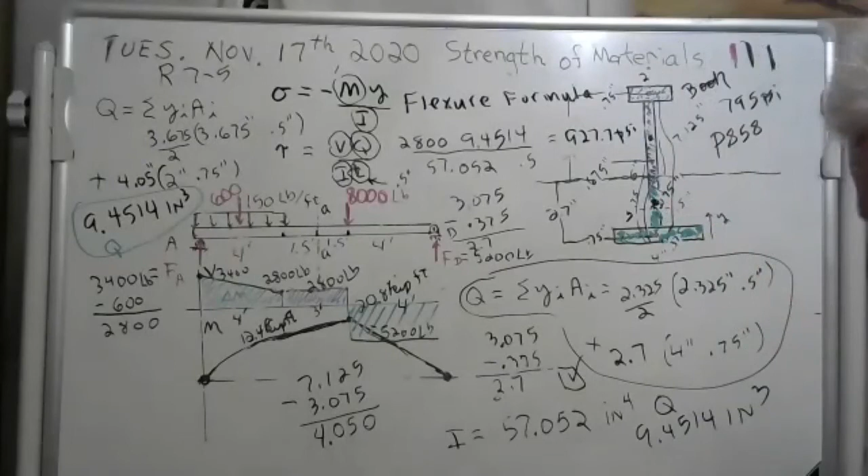"Mr. Griffin, I think there's a 50-50 chance the book could be wrong. I just looked it up on Chegg, and we got the same exact answer. It was 927." Really? How about that? Well, bless your heart.

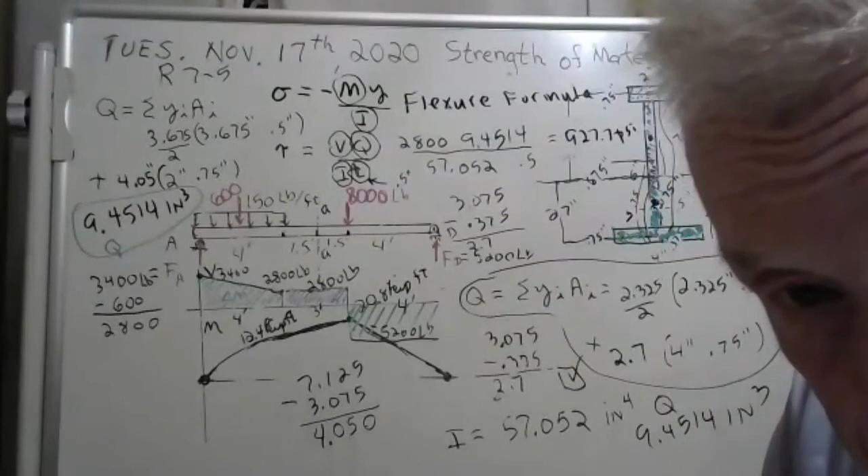Adios, amigos. The book is wrong. I'm gonna write that down. I think that answer is wrong. That happens. It's pretty rare, but it does happen.